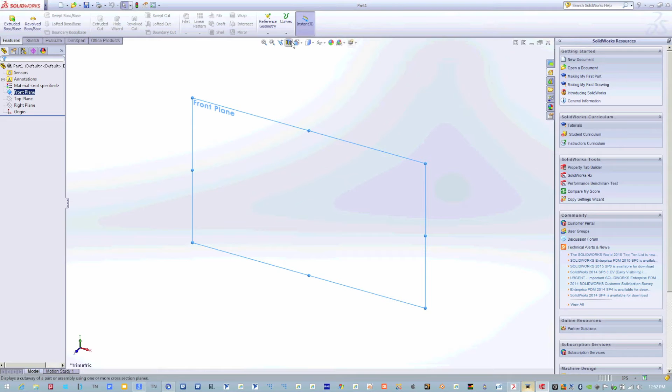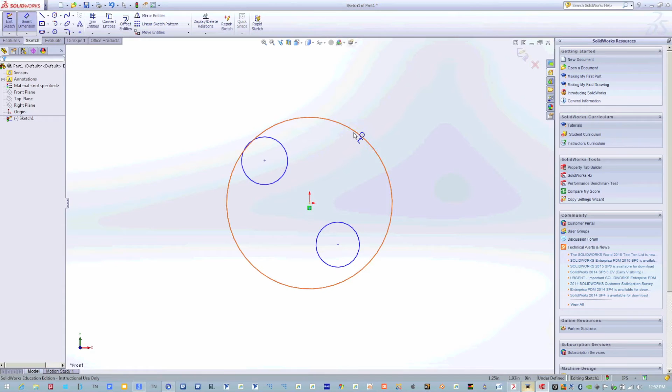All right. So I'm just going to make a beam in SolidWorks. So I'm just going to make some sort of a fancy sketch in the front plane here. So I guess this will be a beam with like 2 holes or something like that in it. And I'm going to make it asymmetric so these are different sizes.

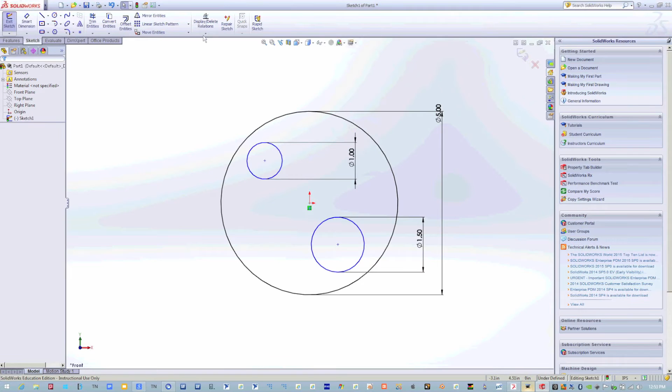So you guys are all familiar with SolidWorks, right? So I don't need to be explaining the steps I'm doing or anything like that? All right.

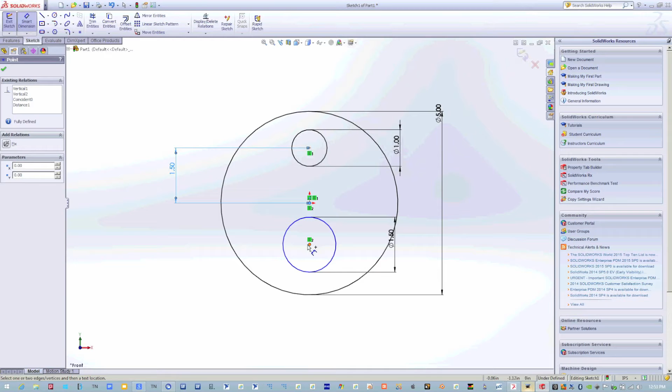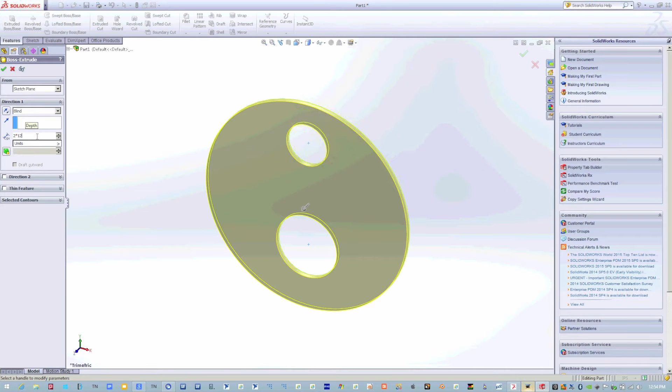Okay, so I made this sort of fancy geometry really quickly in SolidWorks. In Patran, you could still do this, but it'll just take you a little longer. So that's the benefit of doing it in SolidWorks. And now I'm just going to extrude it. How long do you guys want me to make it? 12 feet? Yeah, but that'll probably be a little much. 2? All right. So we got this thing.

Now the key to exporting from SolidWorks is when you go to Save As, right here, you want to select the IGS part. Where is it? Right here. IGS. You could export it just the way it is, and it'll export as a bunch of surfaces and lines. But those are going to be a little hard to work with in Patran.

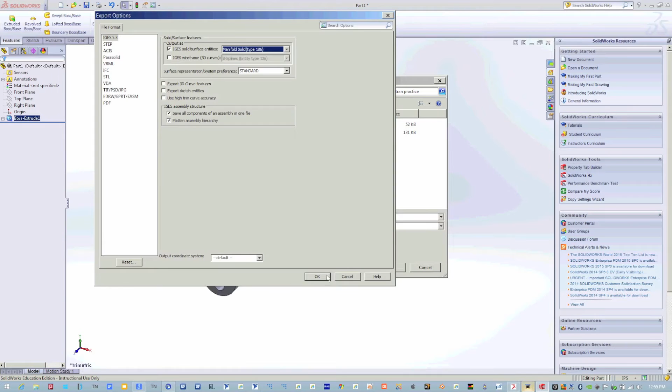So what you got to do is go to Options, and right here, on mine it's already set to solid, but on most everyone else's it'll be set to bounded surface. So make sure to set this to solid. That way it'll actually export as a solid thing that you could use directly in Patran without having to make any other changes to it. All right, so let me just save this to my desktop. Come on. Sorry.

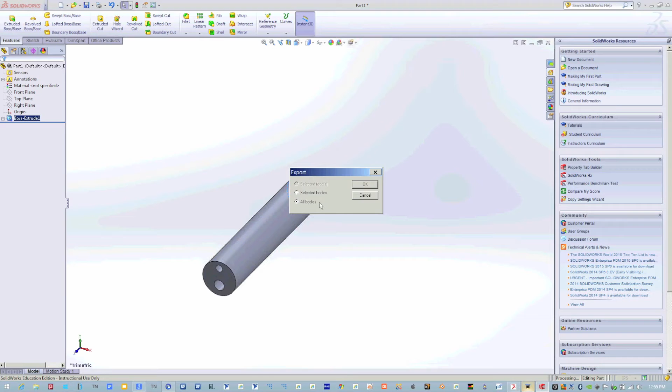And here, if you have a part that's made of several things, you could export them individually by doing selected bodies. Since I have one part, I'm just going to do all bodies. All right, so now we're done with SolidWorks, and we created this IGS file right here. Now we could go back into Patran.

In Patran, we want to create a new database since we're starting a new project. And let me just call this something like, all right. And the only thing you have to do to import this guy is go to File, Import. Here we are selecting the type of thing that we want to import. So we want to import the IGS file. And so I selected IGS here in source.

And now the thing you want to always turn off is this import as parasolid, because that's a little more advanced and I haven't been able to get it to work very well. It works just fine without it. So make sure to uncheck import parasolid. And then here you could find the file that you want to import, and it gives you a summary of all the things that you're importing.

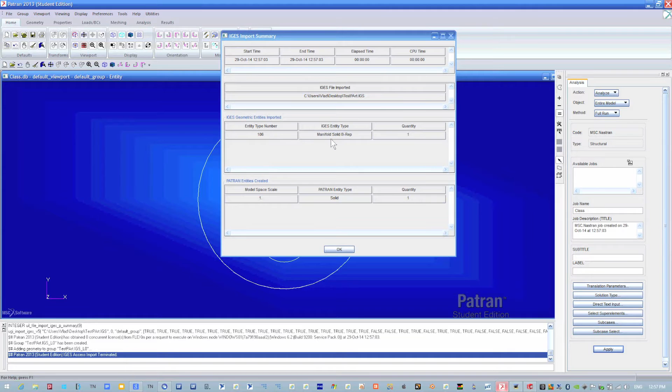Now for your projects, you want to make sure that this quantity says 1 right here. If it says anything other than 1, then the thing you built in SolidWorks is like 2 separate things that got saved as 2 separate solids. So you want to make sure that whatever you build in SolidWorks is 1 solid, otherwise it's really hard to do an analysis on it. So just make sure this quantity is set to 1 right here.

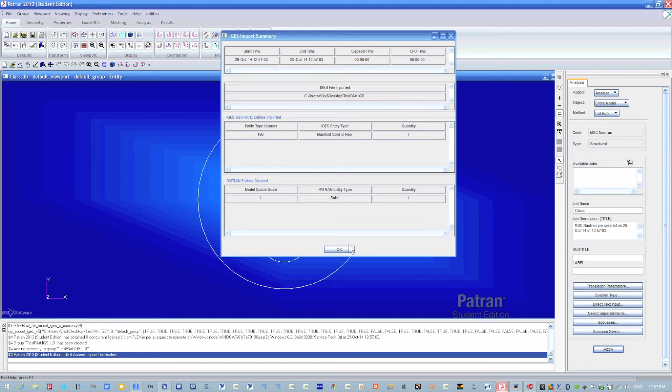And if it's not, then you got to go back to SolidWorks and make sure that your model is exactly the way you want it, if you didn't create some other thing somehow on accident. Okay, so here's this. Right now it looks 2D, but you have your controls here in Patran that'll let you view it from a different direction.

So here's this. Let's see, how do I zoom? Sorry, my bad. Got to remember how to zoom. How do I zoom? Oh, wait, hold on. There's a keyboard shortcut to it. Hold on. I was doing it this weekend and I forgot the keys again.

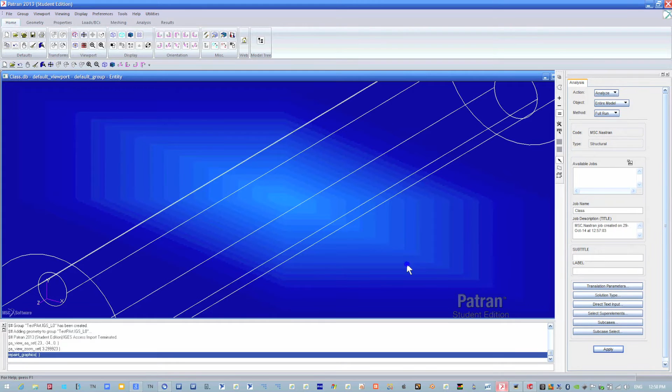Okay, well, all right, forget that. All right, let's just do this.

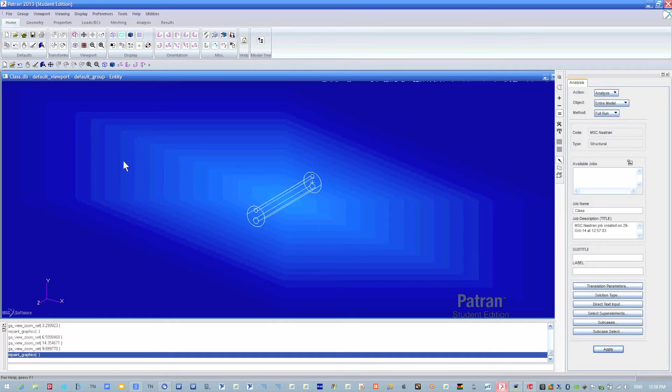So there's a really cool zooming thing, if I could ever remember how to do it. Oh, here it is. So you hold down Control and the middle mouse button, and it lets you zoom with your mouse. This is way more convenient than using the zoom button right here, because the zoom button sometimes causes your view to glitch, and then you have to refresh your view by hitting this repaint graphics button. So I would recommend doing Control plus middle mouse button and moving the mouse back and forward to zoom. It just works a lot better this way.

So let's make this thing solid. So here we have our part. And okay, so now in order to run the analysis on it, we're going to have to tell it what it's made of, what the forces on it are, and where it's anchored.

So does that mean that if you were to put material properties in through SolidWorks, it wouldn't? No, it wouldn't. I'm pretty sure IGES doesn't bring material properties through. You might be able to do it somehow. I didn't want to play with it too much because I would rather do it through Patran, because then I know exactly what I'm telling it.

In SolidWorks, you have to assume that the export is going to keep everything exactly the way you want, like the units and stuff like that. Because one of the big things in Patran is it doesn't have units, so you have to make sure to keep all of your own units. So if you rely on SolidWorks, it might be different from what you expected.

All right. So we already did all the geometry stuff. That was the importing, so we get to skip the geometry tab. Now here in the properties tab, we can do isotropic. And for adding a new material, you want to give it a name. Something like that. And now you're going to give it properties.

What do you guys want me to give it as an elastic modulus? 3? Okay, let's do 3 to some power. 3, I don't know, 10? All right, that's good. Poisson's ratio, let's do something. All right, so now this thing's got its properties, and we don't need to change any of the other settings, so we hit apply. And now my steel is listed in the existing materials.

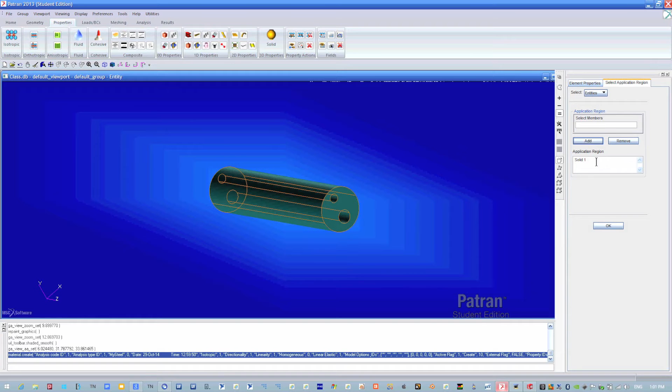So we hit add. Now it's added. And then we hit apply, and we see that the set we just typed appears here in the existing sets. So that was applying properties to it. Now we can apply our loads and boundary conditions. When I was building this, I was assuming that one face was going to be at a wall or something like that. So let's rotate this. I'm rotating by holding down the middle mouse button and dragging my mouse.

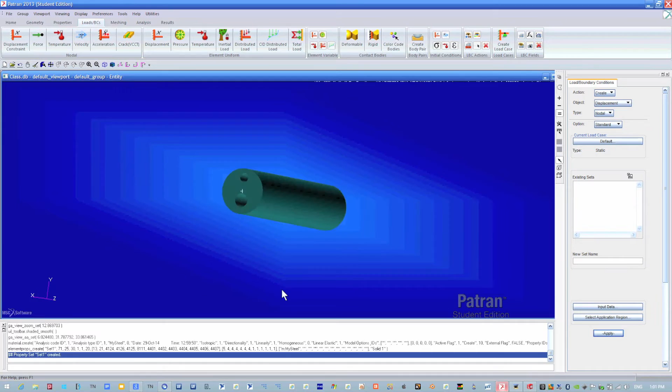So we're going to just constrain this. And we're going to say that the translation is going to be fixed, so it's going to translate 0, 0 in each direction. And I don't want it to rotate either, so 0. So both the translation and the rotation are going to be fixed. And we select the application region.

Now here again, like I was saying before, you want to make sure that you're set to the right selection. I don't want to be set to a point because I want the whole wall to be selected. So I'm going to select the surface. Whoops, no, not that. This one here, surface. And so now I can actually select the face.

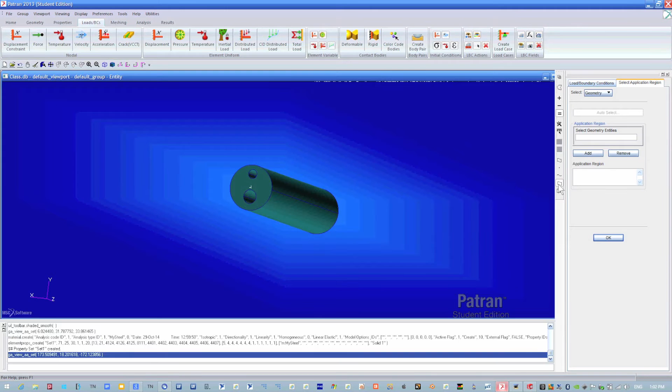So, what you notice here is it still says solid, but it does 1.2. The first number is the solid that you want, then the point is the face on the solid, and then if you have another point after that, it's an edge, another point after that, it'll actually be a point. So if I did 2.1, that'll be the first face on the second solid, and so on and so forth. But right now we just want the face, so that's why it's 1.2 right here.

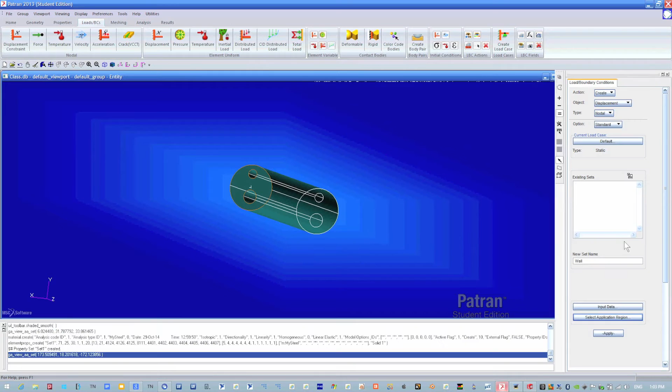So we add that, and now it's saying that the second edge on the first solid is where it's attached at. Okay, and we hit apply. So now we have our little constraint indicators here. And I want to apply a force. For this force, I'm going to apply it to this inner ring right here, to the edge of the inner ring.

And let's say, how much do you guys want the force to be? 1 million? Okay, let's do 1 million. Might be a little excessive, but okay. Yeah, that might be a little too much. All right, let's go for 100,000. Or whatever I just typed.

Okay, so select the application region. Here, I don't want to apply it to a face like I was saying before. I want to apply it to just that edge of that circle. So I'm going to select this curve or edge, and it's going to allow me to apply it to this edge. See, it says solid 1 here. So I'm going to apply that. And I'm also going to apply it to this bottom edge of this circle as well, so it will be applied at 2 places.

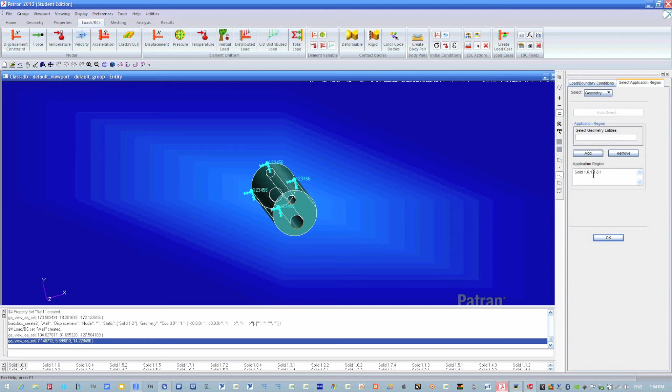So now you notice it's solid 1.6.1, so that's on the 6th face of the solid on the first edge, and then on the 8th face of the solid on the first edge. All right, so now this is applied, hit apply, and now we have our 2 forces that are going in the x direction.

All right, so the next thing you want to do is, since SolidWorks doesn't bring in any of its own meshes, it just gives you that geometry, you're going to have to create your own mesh. What I would recommend when you're working with SolidWorks parts is doing some of these advanced meshing like uniform and one-way bias. But I don't want to spend too much time on that today because you guys will be having that on Friday. So I'm just going to make a basic mesh right now because these can take a little while to get exactly right because you might go over 5,000 elements, and it's just kind of tedious.

So I'm just going to create a basic one here in the solid. We can set this to TET4. It doesn't really matter, it's a little easier this way. For the parts, I'm going to select the solid, just grab the whole solid. And here is where I get to play with the mesh size. I'm going to turn off the automatic calculation and turn down the element size a little bit smaller, so we can get smaller elements. I'm going to try to get as close to 5,000 as I can. So let's just do 0.5 for now. All right, and apply.

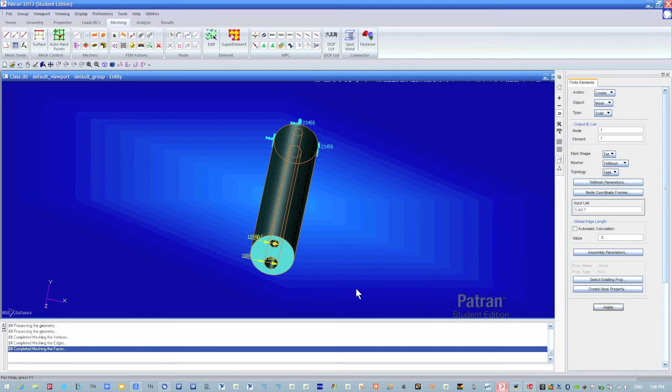So now it's going to work for a little bit. Right here, we can't really see anything because it's all purpled out, but you could hit refresh graphics so that you can actually see what it looks like. So this looks pretty nice. It's got a very nice fine mesh here, but the elements went over 5,000. The way I know that is the node tells you the next node that you're going to put in. So if the next node is 5,943, then it means you already have more than 5,000 nodes.

So I'm going to change this number right here to something like 7, and then hit apply again. It's going to ask me about overwriting. This still looks okay, but our element count is under 5,000. So I'm going to try to get a little bit closer, but I won't play around with it too much. All right. List all.

Refresh the graphics again. Yeah, it's closer. Not too close, but this is good enough for our analysis. You guys can play with that number to get a little closer, but I'd honestly recommend for your projects using directional bias, which we'll go over on Friday.

Now that you have everything meshed and imported, go to analysis, and we want to do an analysis of the entire model. Select entire model, and here you can give it a job name. I don't know, class project, cool.

One thing to note is I don't put any spaces in any of the names I use. That's generally better for Patran. I think you can do it in some places and not others, so I just say don't put spaces anywhere. You could put an underscore if you really need a space.

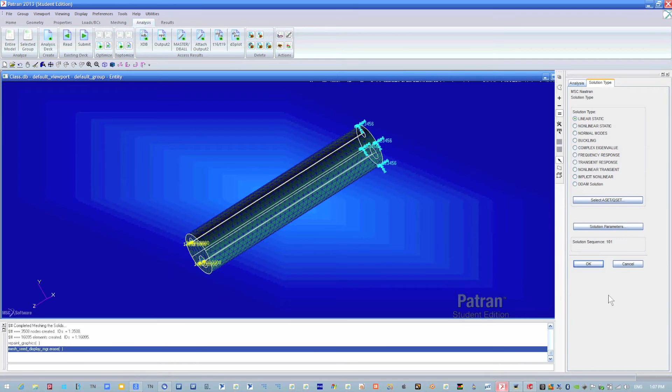The things you want to do in this analysis: make sure your solution type is linear static. For subcases, make sure you have output requests set to output displacement data, stress data, and I guess the forces are also important.

The way I got to that was going to select, then subcases, and in subcases I went to output requests to get to this menu. If something you want isn't listed here, you can select it from the menu on top right here.

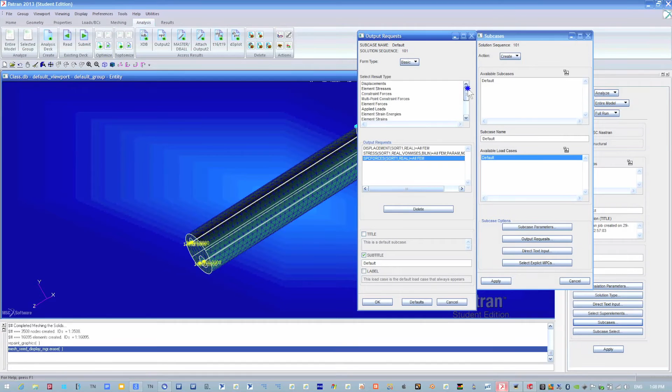Okay, so everything is already set for me the way I want it, so I can just hit apply, and Patran will run this analysis. Hopefully nothing will crash. All right, looks like it's done.

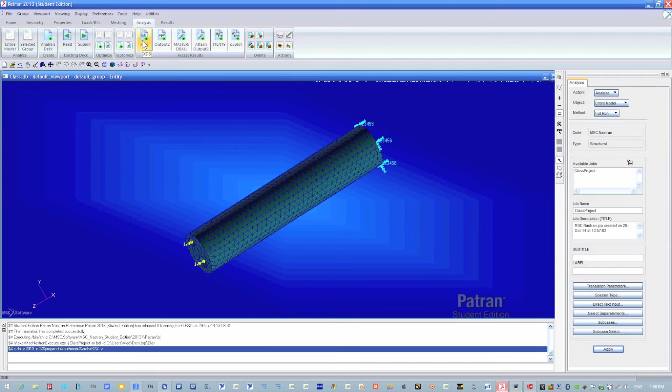The next thing we want to do is view our results, so we need to attach the XDB, which is the database. We go to database, and here we have our job name, class project. So that's what we want. If you were running several jobs, you'd be able to choose from different ones here.

Also, when I was taking this class, my project crashed several times, and I tried to create a new database for it. I tried to just run the analysis over and over again under different names, and eventually I got cluttered with a bunch of projects here, and nothing would work.

So what I had to do is instead of access results, I went to delete, and I was able to delete all the useless ones, and then made a clean fresh one, and it worked after that. If you're working on something and it doesn't work and you have a bunch of jobs here already, go to the delete button, which I got through the action menu, delete, and delete all your old runs and make a fresh one.

So you don't have to start your whole project over again, you could just start the analysis over. That'll probably save you some time.

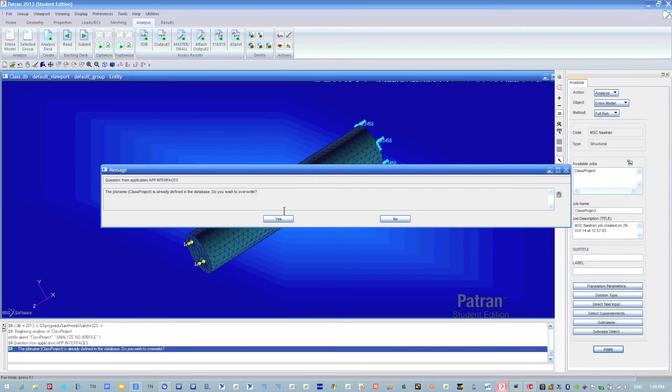Okay, so I already applied the—oh, I'm sorry, hit apply. Oh whoops, that was the analyze, I thought it was the XDB. All right, well this will only take a minute. I just ran this thing twice, but it should be fine. So go to XDB and then hit apply.

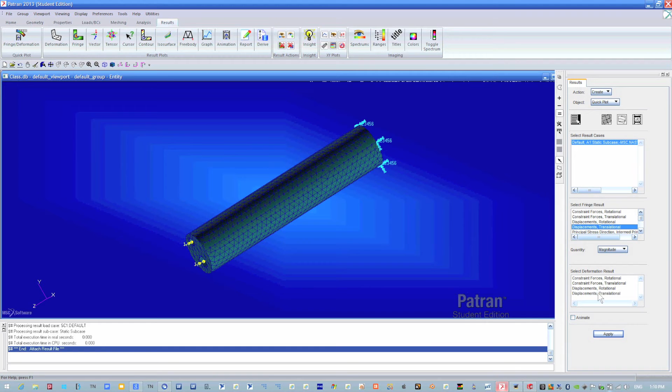All right, now all of our results are attached, and we can go to the results tab and view our deformations. Now I'm going to show you some graphics things to make your results look better. But first, let's just look at the displacement translational. We select displacement here, select the displacement right here, and hit apply. And we see that this thing got displaced.

But what you notice is that the old shape is still here, and it's really in the way. It's really hard to see what's happening because of the old shape still being in that spot. So what you can actually do is go to this guy right here, fringe attributes, I believe.

Let's see, yes, this is the right one. Or wait, no, is this the right one? No, I'm sorry, it's this one. Yeah, okay, here it is. So you go to this third guy right here, deformation attributes. And what you can do is uncheck this that says show undeformed.

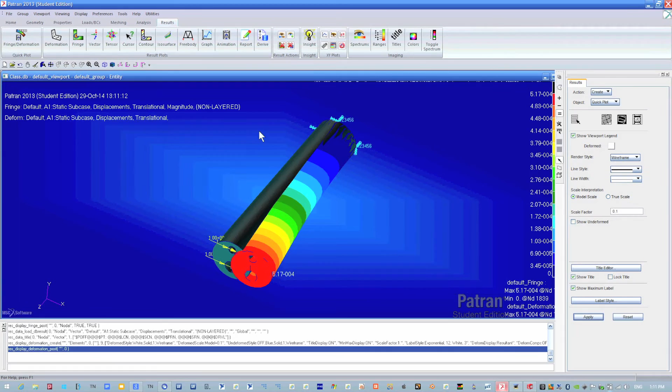And so now when you refresh the view—refresh graphics—oh whoops, thank you, yes, hit apply. Hit apply, and you notice the mesh disappeared. But the part still looks like it's there, and you're like, well, didn't I just turn off show undeformed, so why is it still there? That's actually your original model.

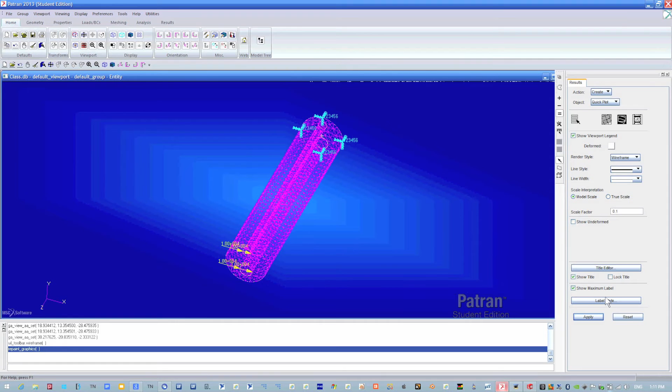So to get that to disappear, you can go back to home and hit the wireframe button. So now if you refresh the view again—I'm sorry, you got to hit apply again. Hit apply. Now, instead of having that big clunky model there, all you have is this thin outline of it. So it's much easier to see your deformation results this way, and this might be useful for generating pictures during your project, so it's not so in the way.

Now, one of the other problems you might have is this blue right here is the same color as your background. So we want to change our background color to make it display better when we take screenshots of this. You could do that by going to display.

Where was I doing this yesterday? Oh, I'm sorry, viewing. Oh yeah, I'm sorry.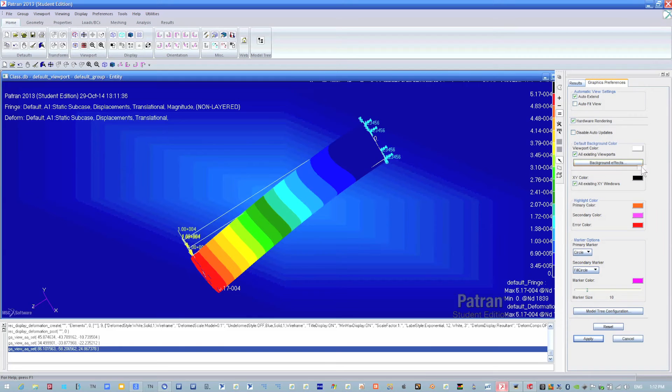It's under preferences, graphics, and then here you can choose the background color, the viewport color. So you can set it to white, hit apply. I can't really see the forces on it, so this might not be the best option. But you could play around with different colors that'll allow you to see the colors better. So like this black one looks good.

So that's that. Let's see. One of the other things that you'll probably want to look at - by the way, to go back to your results and see other results, it's you know how I was hitting the right button here to change this so that it's not visible? If you click the left one here, select results, it lets you show other results.

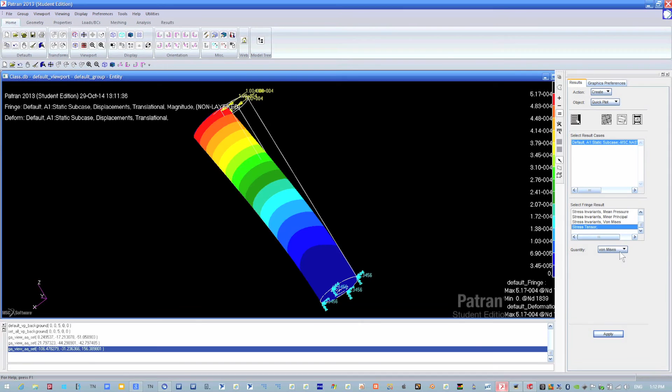So let's go to stresses, and we can choose von Mises, and hit apply. And now we can see the stresses. Now, and of course you could zoom in on here and look at the stresses right here where the force is actually being applied inside these channels.

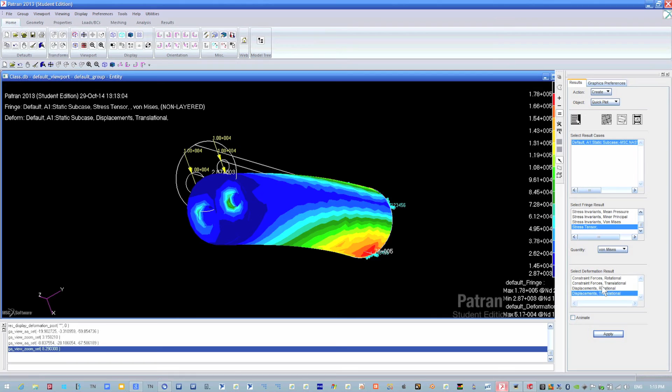But one of the things you might notice that I did that was weird is I kept this at displacement translational, even though I did this as stress. The bottom box here is actually the way it displays your information. So it displays the stresses overlaid on top of how much this thing has displaced.

If I actually change this to like forces, it'll look really weird. So you see, it'll display the deformation in this thing by the magnitude of the force. So this is not what's happening at all physically. This is just representing the magnitude of the force, and it's really hard to see that. So it's really hard to visualize what's going on there because of that.

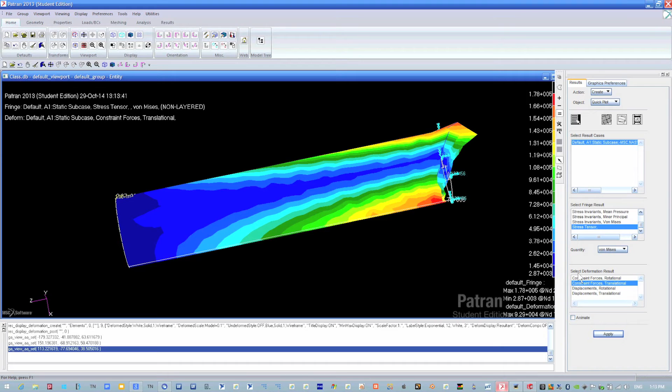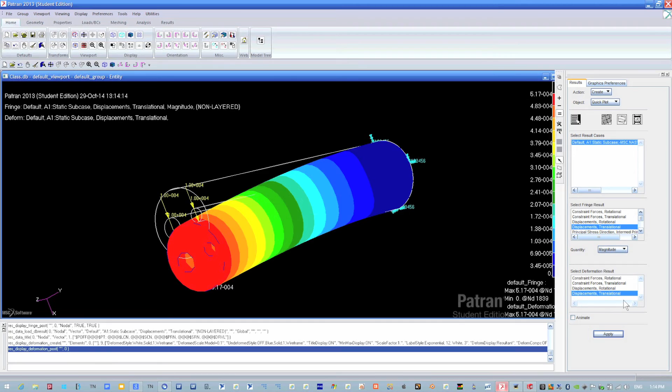So you always want to keep the bottom box on displacement translational, because that way you can see how it's deforming, and then the colors are coming from this box up here - whether we have it set to stress or displacement. So those are just the top boxes for the colors, the bottom boxes for how the part is actually deformed visually. And I'm pretty sure that was actually all that I really wanted to talk about.

That went a lot faster than I intended it to go. I guess I was talking too fast. But if you guys have any questions about this, I could do other models or anything like that if you want.

Remember in the beginning, I was having trouble following how the part was exporting from SolidWorks into Patran and making sure that the quantity stays one. Okay. So when you're building a model in SolidWorks, one of the things that you can do, let me go back to the sketch.

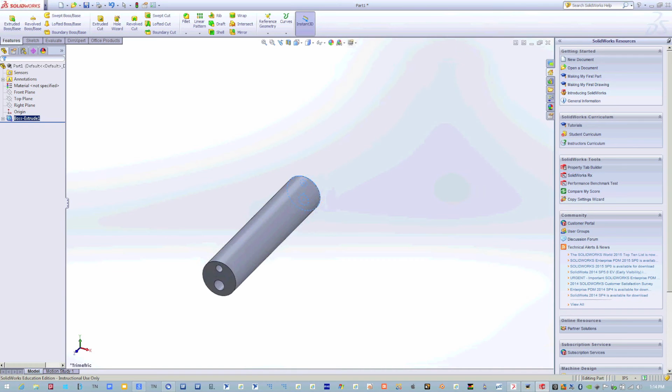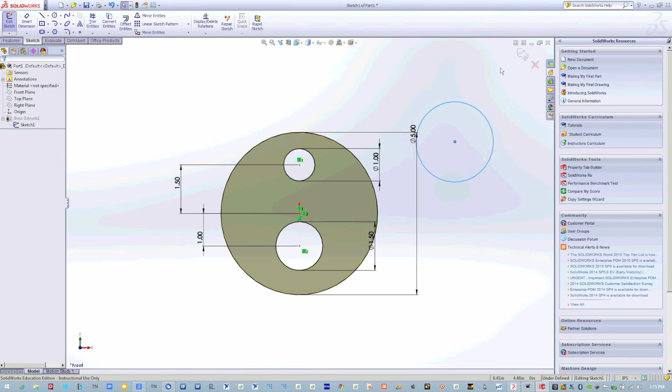Okay, so you know how I made the sketch right here? If I made another element here on the side, and I'm not even going to bother about dimensioning it and stuff. So here's this thing, and now I have two parts to it that got extruded.

If I export this, this will actually get exported as two separate solids. So when you import it into Patran, that number that I was talking about is going to be set to 2. So now this is obviously two things, and you can very clearly see that.

But sometimes when you're working on a really complicated part, the other component that could be throwing you off is it might be a really tiny thing in the corner. Like I don't know if you guys remember in the actual SolidWorks class, there was a particular model for one of the homework assignments, where it's like several circles coming together, and it looked like it worked perfectly, but because of the dimensions he gave you, there was actually one little tiny piece that was still sticking out, and you had to zoom in really, really close in order to be able to see it.

So if you go and import your model into Patran and it says 2 on there instead of 1, then that'll be something to look out for. And I'll show you how it does that in just a second.

So let's save this. We'll go to Save As, and here we select IGS again. And here, let me just call this part 2. And it obviously didn't type.

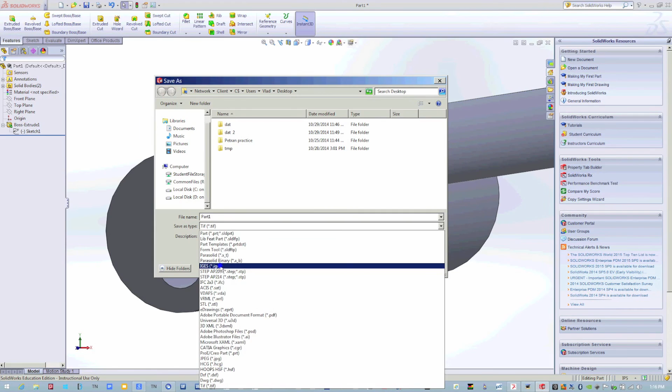Okay, so now again we got to go to options and make sure this is set to solid. Now when we hit save, it was in your save dialog box - there's a big button called Options. Go into there and you'll have a setting that says you're exporting as a surface. Make sure to set that to solid. Manifold solids? Yeah.

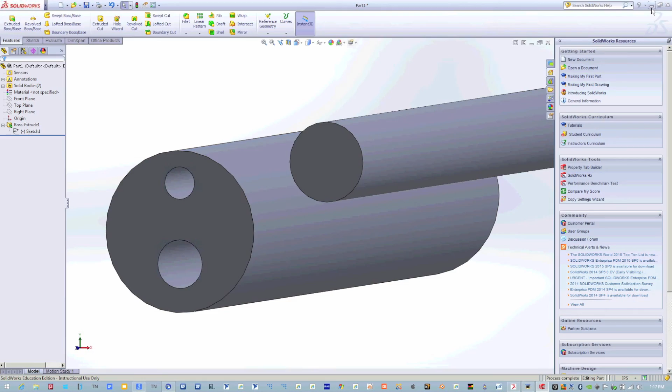Okay, so I just exported this. Let's see - all right, here's my part2.igs.

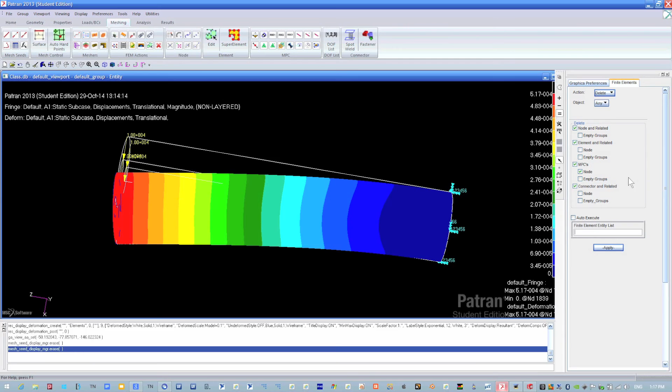So now when we're importing into Patran, let me just start a new project. Actually, no, I think I can just - all right, so this is a good time to show another cool trick. If you want to delete stuff, you go to the thing you want to delete. For example, we want to delete the mesh. Instead of Create, I'm in the Mesh tab right now, I'm just going to set it to Delete, select the whole thing, and delete everything.

And now I can go back to Geometry. I want to delete the geometry, so again in the Action I select Delete, select the whole thing, and delete it. All right, and I'm going to refresh the view so everything goes away. All right, so now everything is gone.

And we can go back to File, Import. Here in Import, we select IGS as the thing we want to import. We make sure to uncheck Import Parasolid - you see this checkbox that says Import Parasolid, make sure to uncheck that. And now let's select our part.

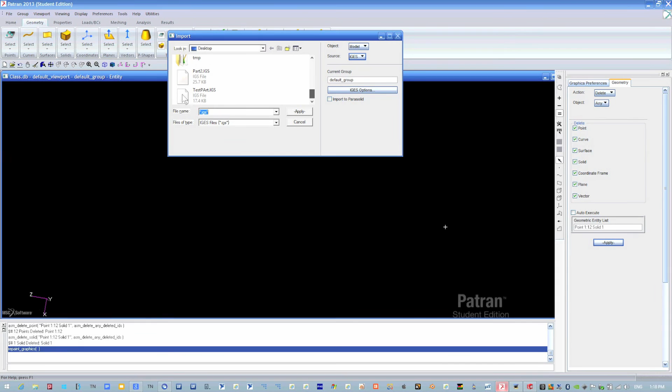Okay, and here when we imported it, you notice it says 2 - right here in the box, in the quantity, it says 2. So if it says 2, you probably have something in your geometry in SolidWorks that's not exactly correct, unless you actually intend to import 2 parts, in which case the analysis is a little bit more complicated. But I'm not going to do that now.

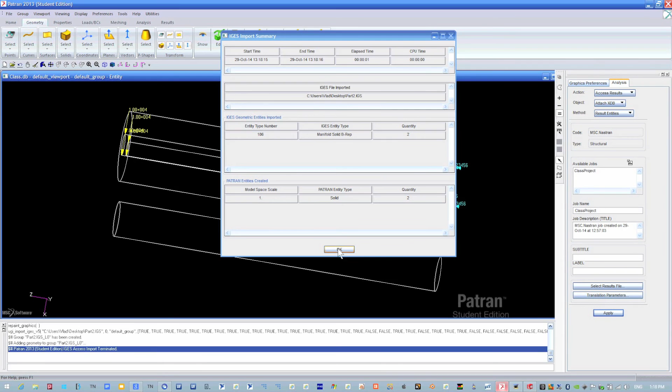Okay, so you see that both of these are imported, and I guess I could show you what happens if you do analysis on these 2 parts. It looks like all the forces are still there, which is weird, but okay. Let me apply some loads to this thing as well.

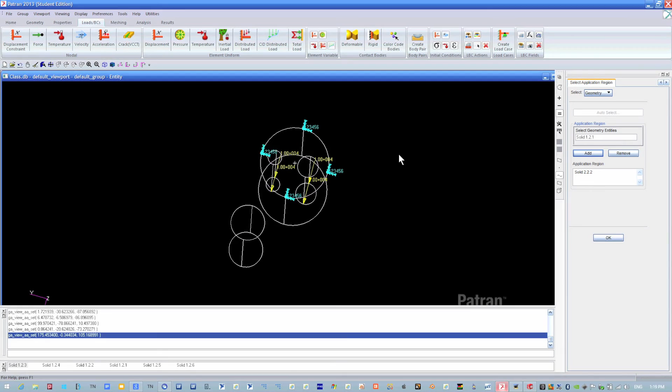Displacement constraint. Application region - I want to apply this right here. Face. Okay, and the force.

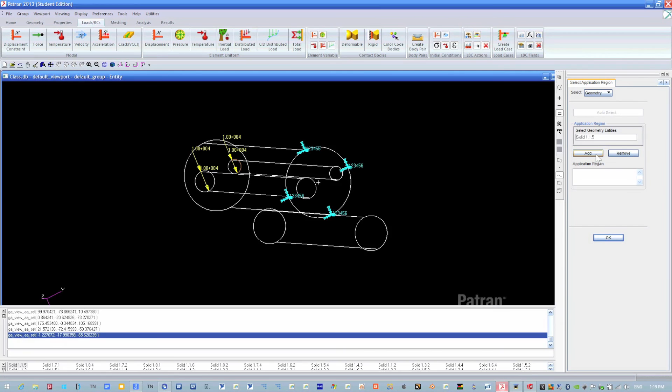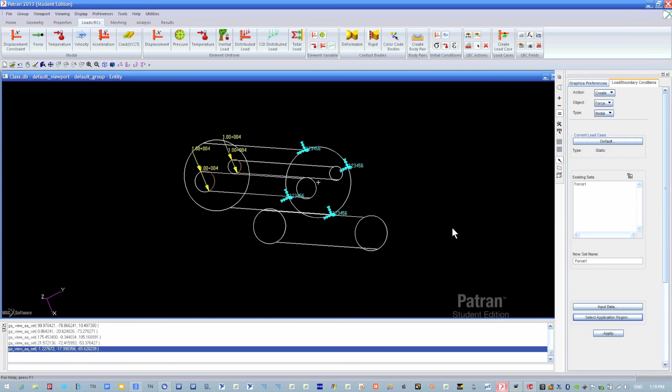You know what, these 2 parts are probably too far away from each other to show you what I wanted to show, but I'll still run the analysis anyway just so you could see it. What I actually wanted to show you was that if the 2 parts are close to each other, and you're thinking one part is going to push on the other part, it's not going to do that. There is no collision detection, at least as far as I know, in Patran. So if you build something with 2 parts in it, and you're thinking when one of them deforms it's going to push on the other part, it's not going to happen because you don't have collision detection. Unfortunately I drew this too far away from each other, so you're probably not going to see it anyways, but let's just run this and see if we can get something to happen.

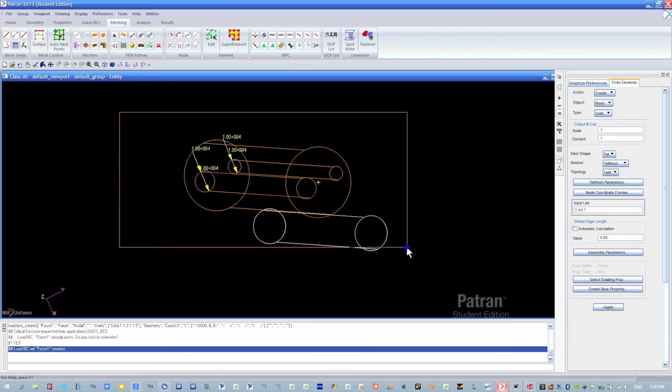All right, so okay. When you import the model, there's a little box that says Import Parasolid - does that mean you check that? Uncheck that, if you do it, it causes it to crash. I've never been able to figure out a way to actually do it with that thing turned on.

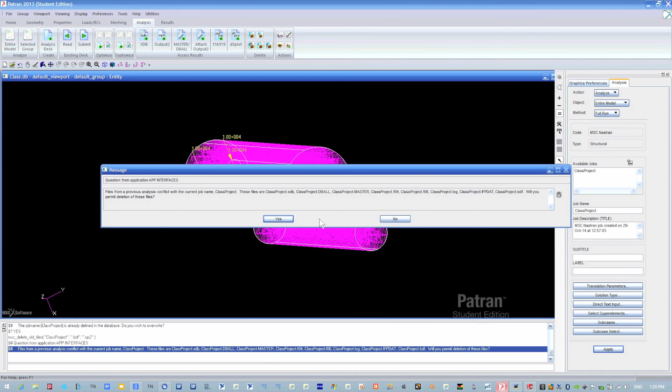All right, so now I meshed both of these two things, and I'm going to go to Analysis, run it. And while it's running, one thing to note is it looks like it crashed. All right, we'll see what happens.

But one thing to note is, you know how before importing this new model I did two things - I first deleted the mesh, and then I deleted the solid. You always want to do that first. The way you're building things is you build solid, forces, mesh, so when you're deleting something you always want to go the opposite way: first you delete the mesh, then your forces, then your solid. I actually forgot to delete the forces, but I think it's okay because I just applied the same exact forces, so it should be fine. But it would be better if you do delete mesh, delete forces, then delete solid, instead of deleting the solid first - then you can't delete anything else because it's just floating somewhere in your computer's memory and you don't know where exactly it is.

All right, so that's done. So now XDB, apply, results, deformation - oh, look, it didn't work. All right, so yeah, this thing crashed. Well, anyways, yeah, it crashed because I don't have any results in here.

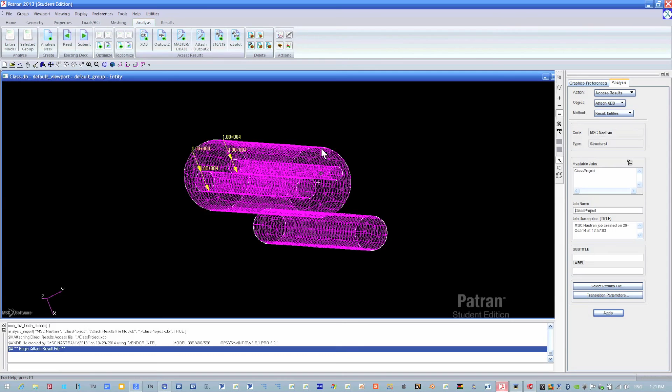So, but the point is, if you were able to get this 2-body thing to work, you would see that one of them deforms, and even if it hits, the other one doesn't deform because it doesn't have collision detection. Let me see if I can actually fix that problem with the results not showing up.

So let's go to delete the existing job. All right, and let's apply the analysis again. All right, let's see if it works. If it doesn't work this time, then it's because I didn't delete those forces when I was deleting everything else. And judging by the black screen, it's probably not going to work.

Okay, let's go to XDB, attach the XDB again. Results. Nope, no results. So if you don't have results, it's because when I was deleting it, I didn't delete those forces, so now it's just screwing everything up. But yeah, the point is, if you have two objects, it makes things a lot hairier, so make sure you always have one object, unless you really, really need to have two objects. All right?

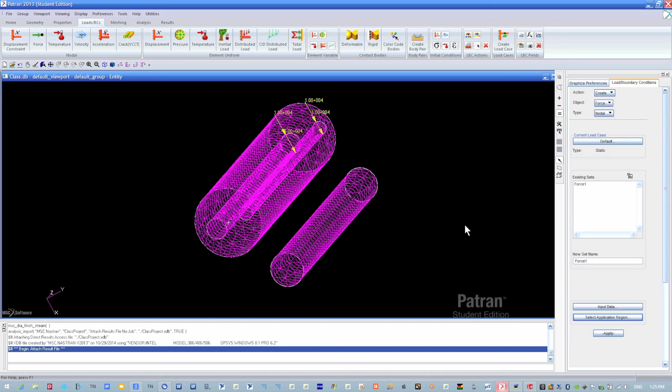So Eric, on Friday, is going to talk to you about actually building a model, some of the tools in Patran you have for shaping things and making it look nice, fillets and stuff like that. He's also going to give some general tips.

So if you guys want to build stuff in Patran, definitely be here on Friday. SolidWorks is good, you can make models in SolidWorks, but if you know how to make models in Patran, it'll save you an extra step, and there'll be less likely a units problem. So Friday will be good for that.